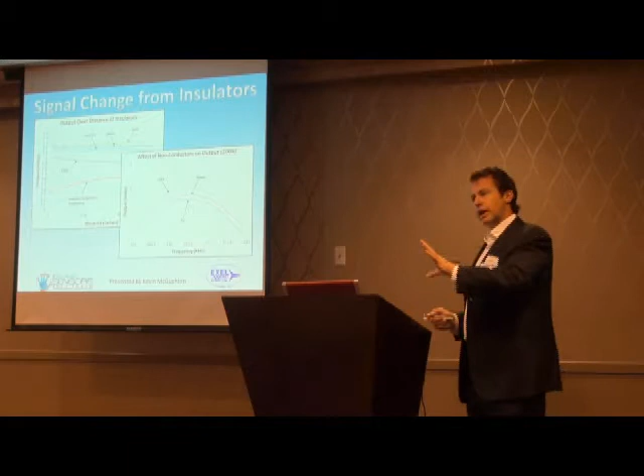Not air? It's not air? Right. Well, the target could be air. It could be air, but you know, the mu sub 0 is permeability in actually vacuum. So what's bizarre is as I move through here, you're going to be able to see that we can not only tell the difference between air, but different elements. For instance, presence of hydrogen, oxygen, or other gases will induce a different effect in the sensor.

Here, we image ceramic, Delrin, low density polyethylene, PEEK, and graphite composite. You'll notice that some of these curves go down while the other curve goes up. That was quite interesting. Why would it do that? But you can also see that we can tell the difference between those plastics or those non-conductors.

Here we zoom in a little bit. This is that resonant frequency shift that you saw earlier where we see the resonant peak. That's air, that's Delrin, that's low density polyethylene. And on that voltage scale, it's a pretty big change. You can spot the difference, yes?

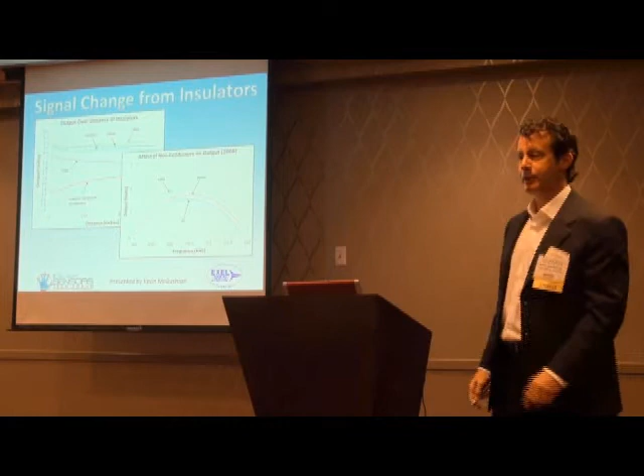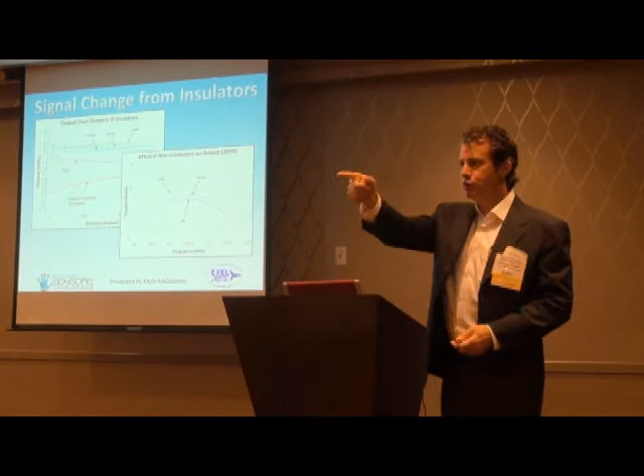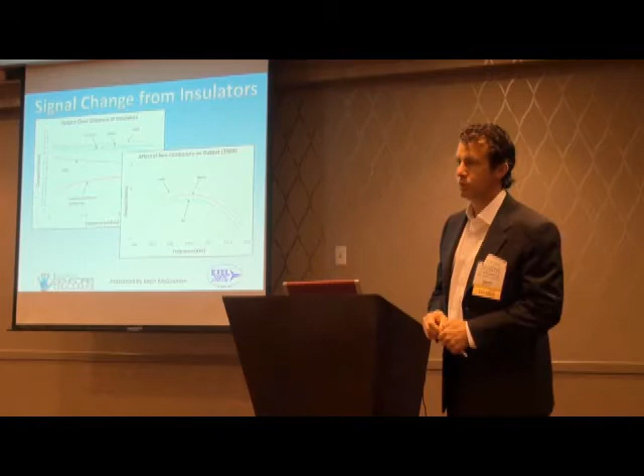So on the graph on the left side, you are taking your scanner and you're scanning across a material? What we do is we park the sensor in intimate contact with... You're moving one in relation to the other? Right, okay. And then we back away from it. And the reason... How fast are you moving it? How fast? Yeah, does the angle of these curves change based on how fast you're moving? No. Is there a time effect is what I'm asking?

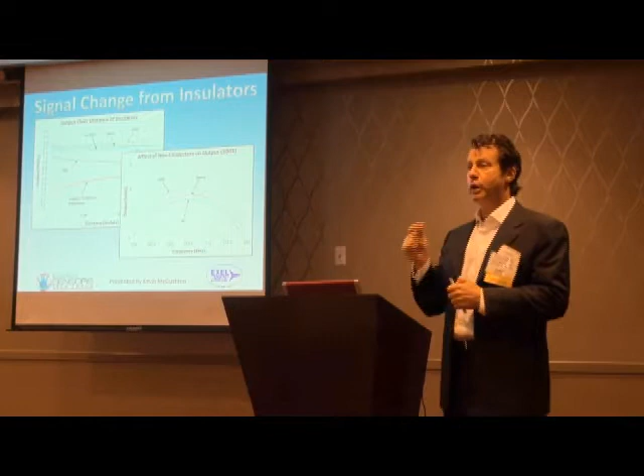There's no time effect other than the time effect you induce by way of either parasitic capacitance or induced capacitance by way of tuning. Every time you put in capacitance, it has a time constant. So the quicker response you want, the lower you want the capacitance to be. I always tune with the minimum amount of capacitance and try to wind it to as close to the frequency that I'm looking for.

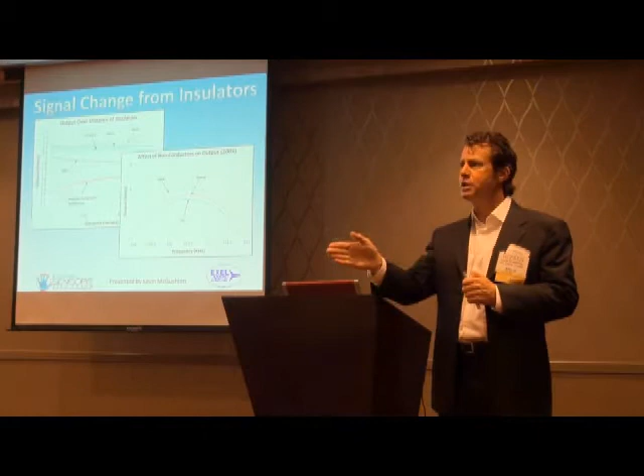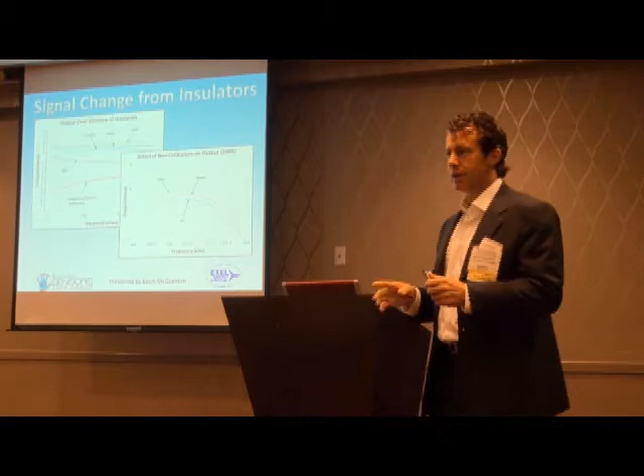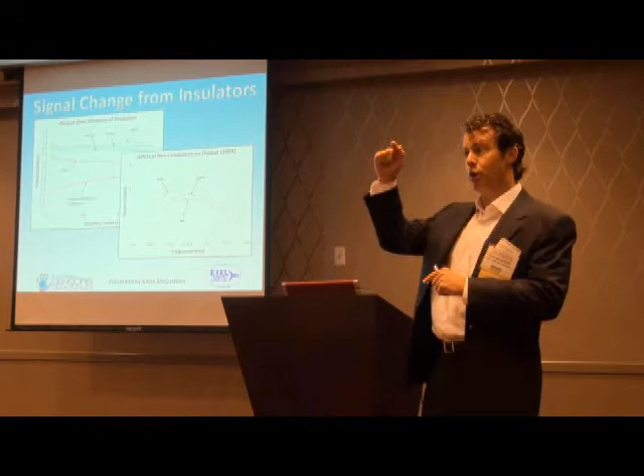So if you were to scan at a different rate, now, you're talking surface speed or moving away speed? Surface speed. Okay. If you were to scan at a different surface speed, would you achieve those exact same plots, or would they be slightly different? I did a number of tests where we're scanning over a crack at dramatically different speeds, and other than affecting data acquisition, we get the same result. In other words, the output peak is the same.

And the thing you have to be careful of is maintaining the same data density, because if it's a small phenomenon, you'd better be acquiring data very fast if you're going to move fast. That's the only caveat to that. Yeah.

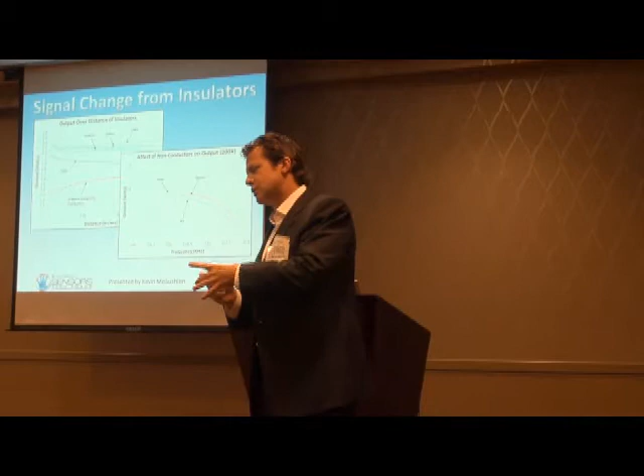Yes? Did you see any effect on sample sizes? For example, sample is oval shaped or circular or rectangular. Do you see difference in your output? Sample geometries. Yes. If the geometry of the target changes in shape, does that affect the output? Right. No, because we can scan a circumferential object, scan around it, or we can scan a flat plate, or we can scan a surface that has varying geometry and still get the same sort of output.

So it's not subject to output unless those geometries affected your distance. Because if distance increases, your resolution goes down some. But the physical shape of the part doesn't affect the signal output. Yeah, so that means that result is somewhat insensitive to the thickness of the sample signal. We have a range limitation depending on how you build the sensor.

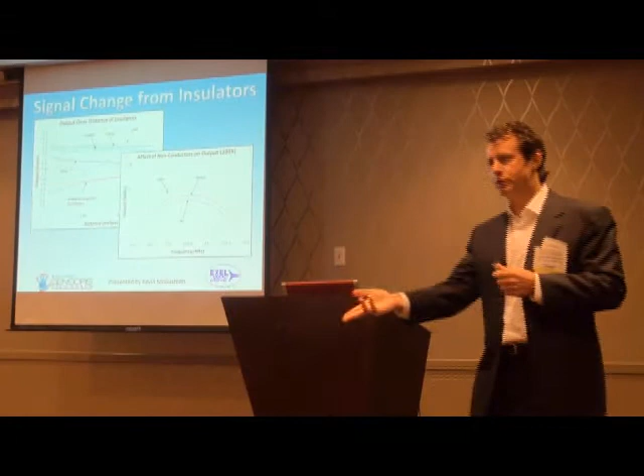And everybody knows about the range limitations when you're dealing with eddy current, because eddy current, as you increase the conductivity of the target, eddy current is diminished because it's being pulled into the eddy currents.

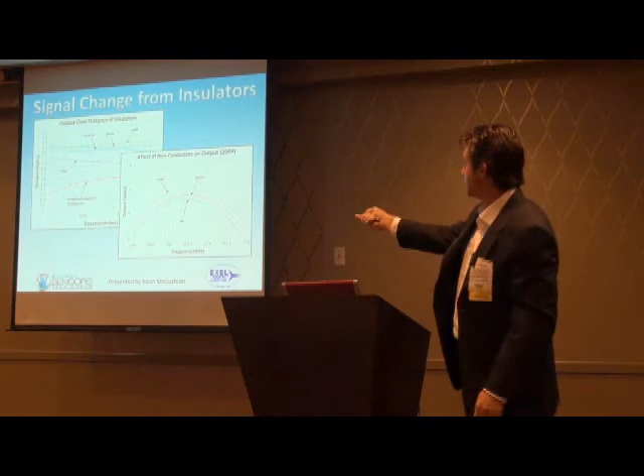Yes? If you don't have boundary conditions, why do you have a change in slope? Oh, because I'm moving away from the target. That was a technique that I developed some years back. I found that if I had a target of unknown material or known material, put the sensor in front of it, and moved away from the target, you get a characteristic slope here. And at about 0.66% of reaching the maximum, I call that our depth of penetration.

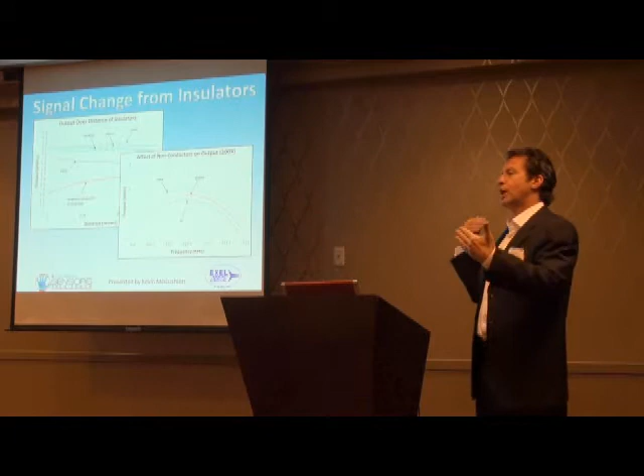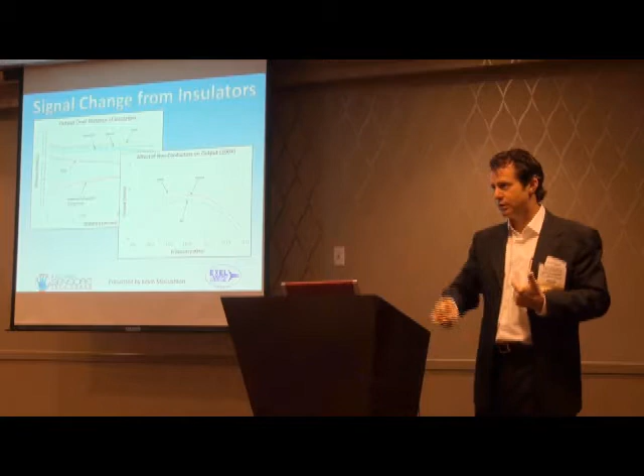I'm able to relate moving away from the target in air to depth of penetration. Does that make sense to you? You're moving across it and you're moving away at the same time? No, I'm not moving across it, I'm moving only away from it, to determine how far into the object I can scan.

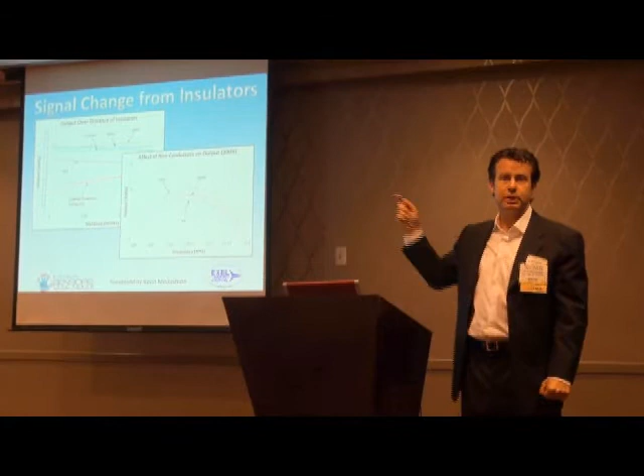I'm sorry, yes? What is the sensor diameter, or what's the ratio between sensor diameter and distance to target? In this particular sensor, it was 80 thousandths outside diameter, 0.080 inches. 2 millimeters. Yes, just slightly over 2 millimeters, yeah.

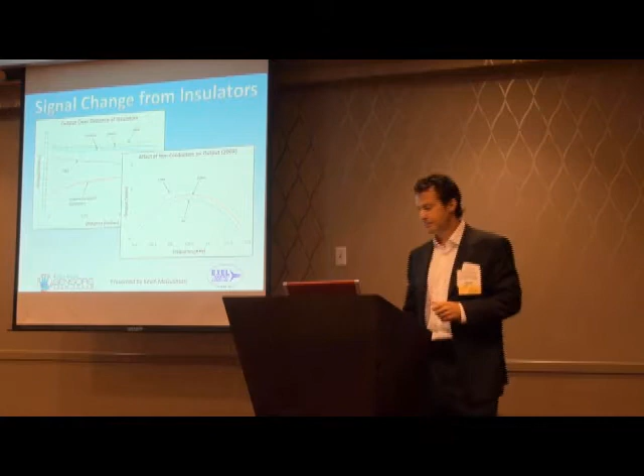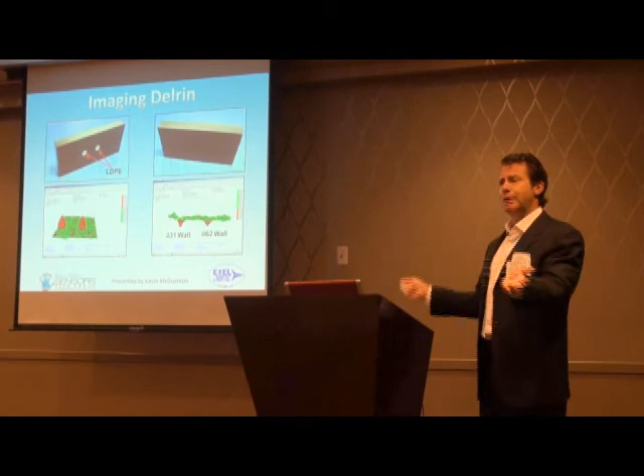Here, this caused me more trouble really than anything else. I didn't understand why we could detect paper inside of graphite composite, FOD, Teflon. And I was doing that for Northrop Grumman, an experimentation for them, where we were detecting Teflon discs and paper FOD that is from the backing of composite. And the question was, well, that's fine, you can see it, why? We're not interested in a magic box.

And so I made a black Delrin block, pressed into it low density polyethylene plugs, and then scanned it on its face, right here. And you can see here we very clearly tell the difference between one plastic and another. So two different insulators being discriminated very, very readily.

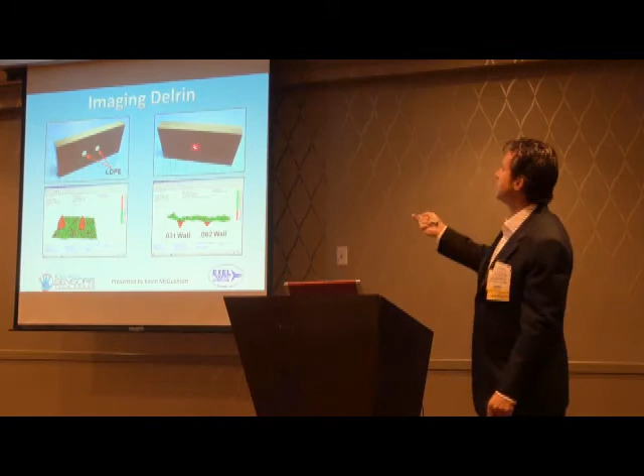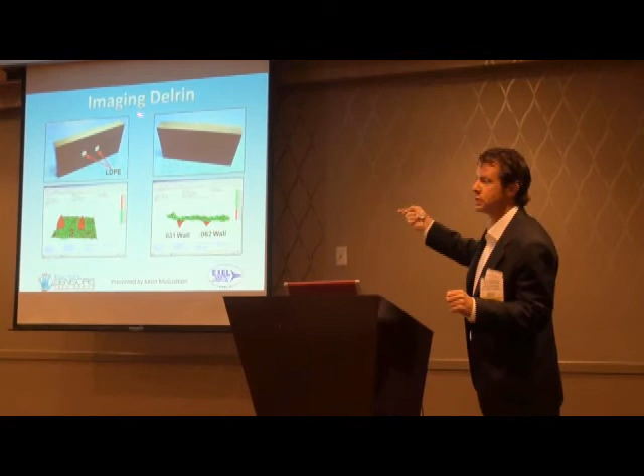Here is just two blind holes, flat bottom holes, one a 32nd from breaking through to the other side, the other one a 16th of an inch from breaking through to the other side. But we scan the other side here. So now what we're doing is we're measuring the difference between wall thickness of an insulator with the background of air.

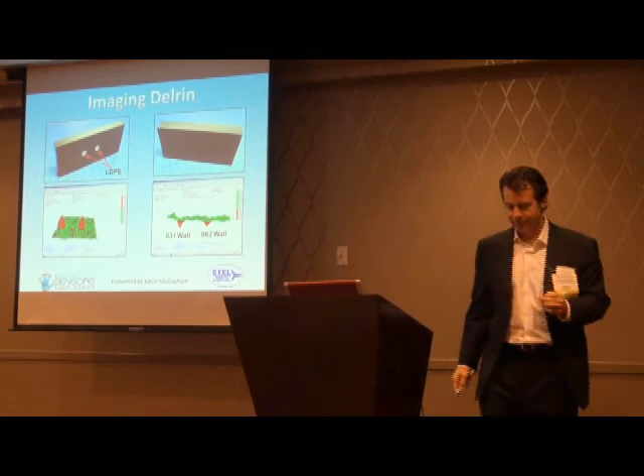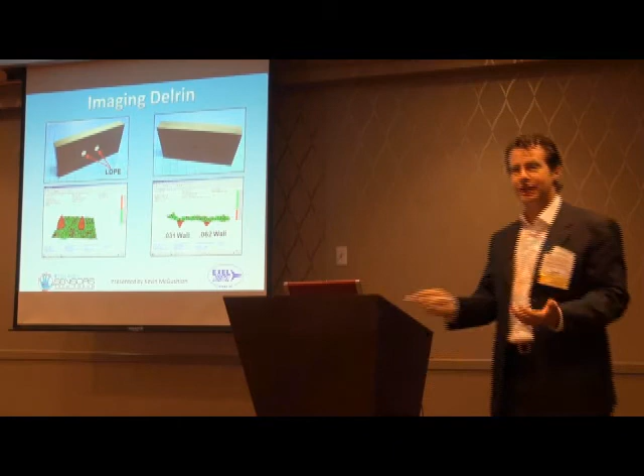Good. When they asked why, what did you tell them? I didn't know. I didn't know. It just did. And this was very, very early on in my research. They handed me the sample. Can you see this? I scanned it. Yes, I can.

I'm not an eddy current expert. I know a lot about eddy current now, but in those days, I was just developing my sensor without having a thorough background in eddy current. And many of you probably know more about eddy current than I know. I've certainly become an expert in this and appreciate the difference between eddy current and this now. But it took a while for me to explain. I had to do some digging on that and a lot of testing.

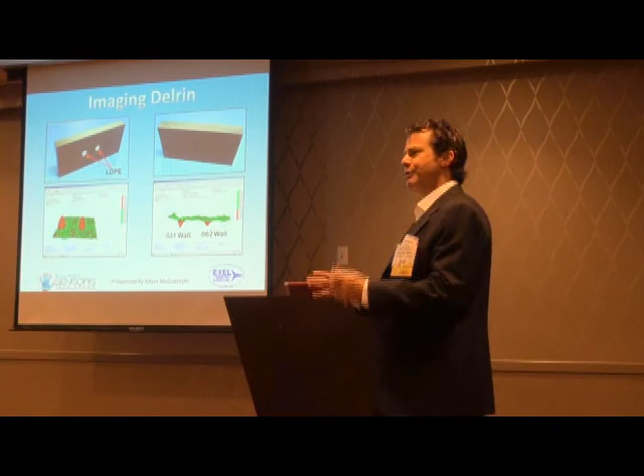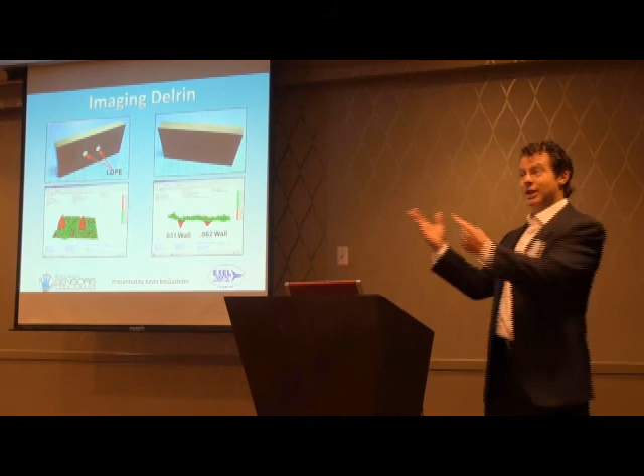Now this graph, you built basically a raster scanner where you just moved the sensor? Yeah, that's it. We have a number of different types of motion control systems. One is I have a test setup where you can basically throw anything you want to in it because, you know, I'm in a meeting, the first thing I get asked is, can you image this or can you image that? And I end up going home with a bunch of samples. And so I needed a scanner that I could just throw parts into and scan it. That's a raster scanner. We have the sensor, it's spring loaded, we go across.

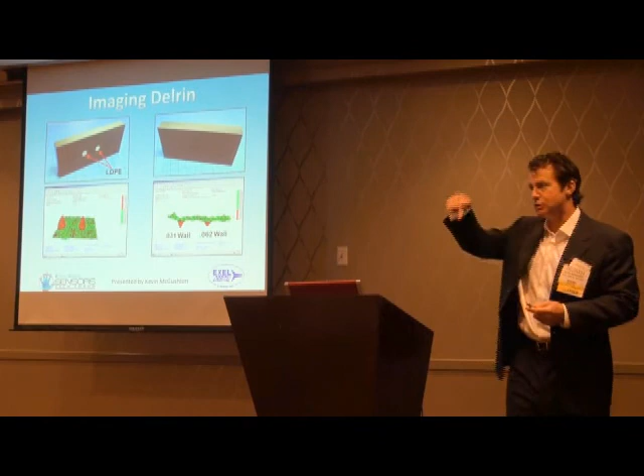How fast is it moving? Like, how long would it take to make this pixelized scan? A minute. And how big is the part? That part is probably 6 inches by 4 inches. We can go faster, but I have stepper motors on this system. That's as fast as they would carry it.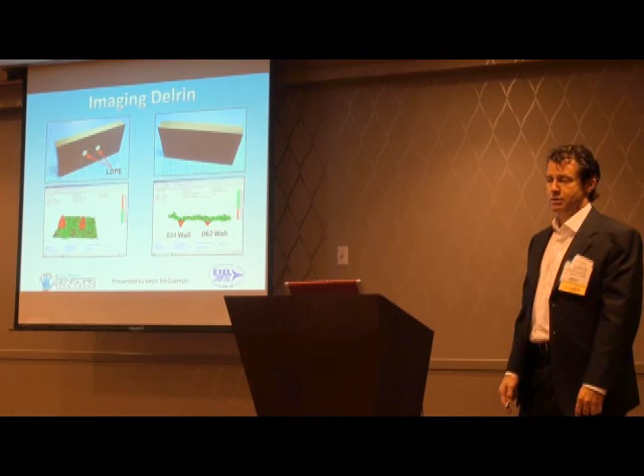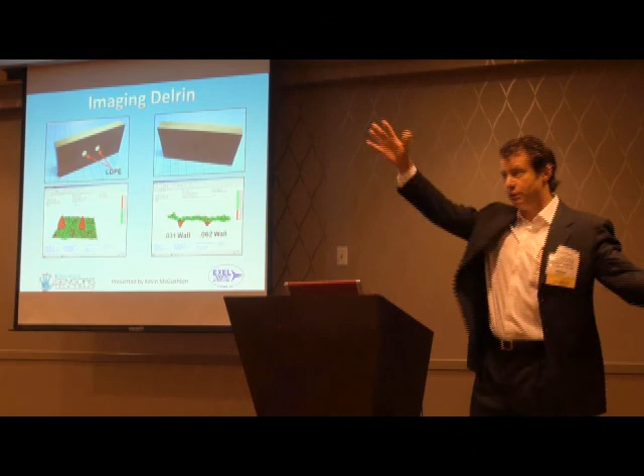It seems to be able to scan at very, very high speed. And you know, if you've ever seen one of these systems that Northrop has, where they're shooting a column of water at a target, very big composite samples, it'll be in there for hours getting scanned. This could scan much faster.